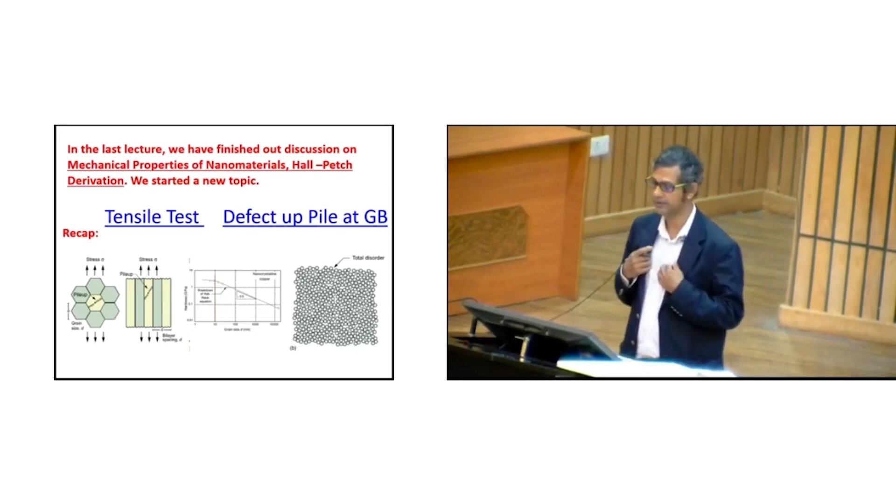So, the last lecture, what did we finish? We finished the lecture on mechanical properties of nanomaterials, and most importantly, we talked about the Hall-Petch equation, its breakdown, and other related aspects. Following that, we started a new topic on thermal properties of nanomaterials.

So, in order to provide you some recap, let me state that Hall-Petch basically originates from grain boundary strengthening. Dislocations generated inside the grains pile up at the boundaries, and this is why grain boundaries act as an obstacle to the pile-up of dislocations. Hall-Petch provides a nice mathematical relationship between grain size and yield strength. This is true not only for single phase materials, but also for multi-layers and even multi-phase materials.

But at the nanoscale, the Hall-Petch equation breaks down. For nanomaterials, Hall-Petch has been found to break down in basically every metallic and ceramic crystalline material. It seems to break down at a grain size below a certain critical value, and that value can range from 20 to 5 or 2 nanometers. This is something widely observed.

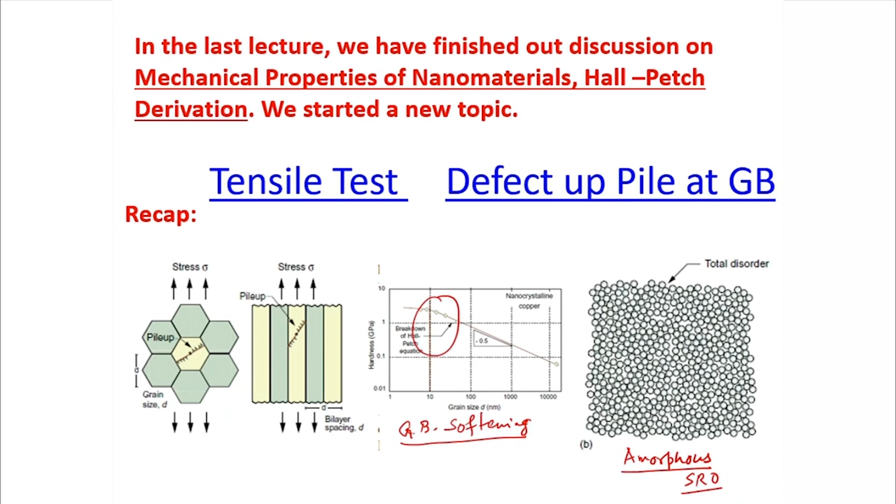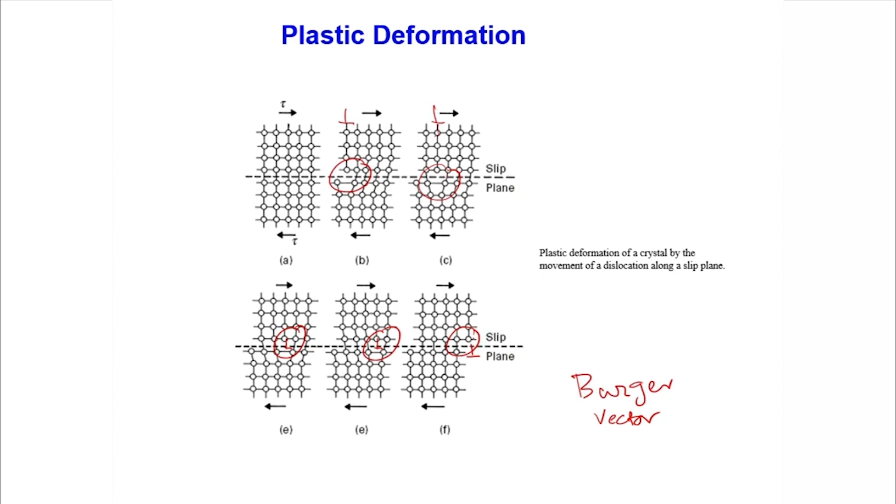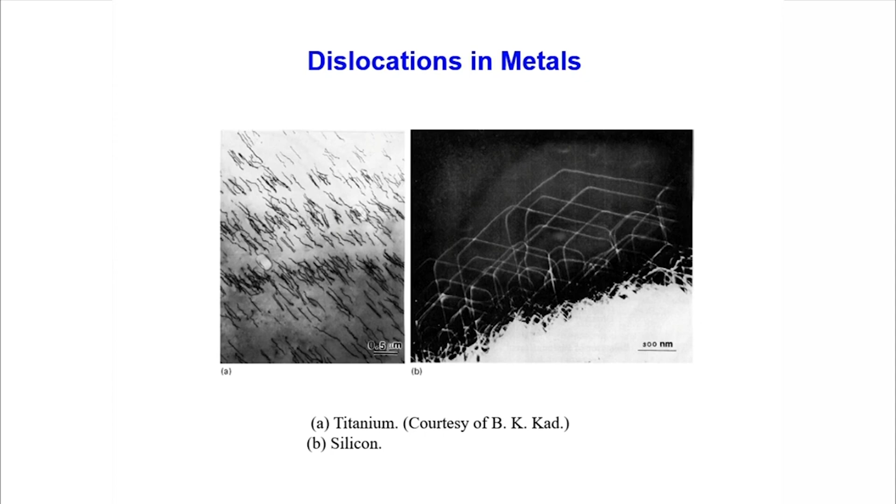As we said, therefore, in nanocrystalline materials or normal materials, plastic deformation which happens because of dislocation motion is the predominantly observed mode of deformation, as compared to amorphous materials. And dislocations are seen under TEM - I am showing this picture again with titanium silicon, where this has been observed. Similarly, it has been observed in ceramics also.

Now, the basic reason for grain boundary strengthening is not only that the grain boundary acts as an obstacle, but also that the grain boundary can act as a source of dislocation. Dislocations can be generated at the grain boundaries, or maybe at the Frank-Read source, then they can move inside the grains, and that is how they create a pile-up. You can see that the pile-up has already started - 1, 2, 3, 4, pile-up has started. So, one after another, just like a passenger standing in front of a railway ticket counter, the same thing happens.

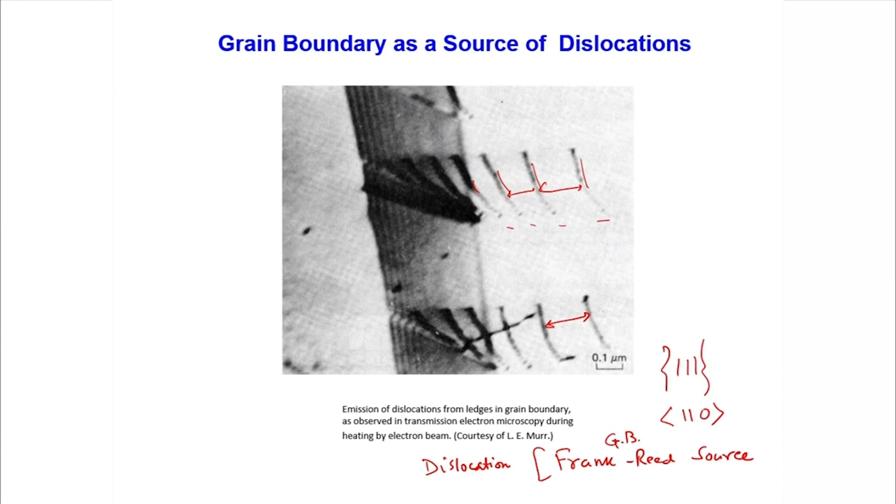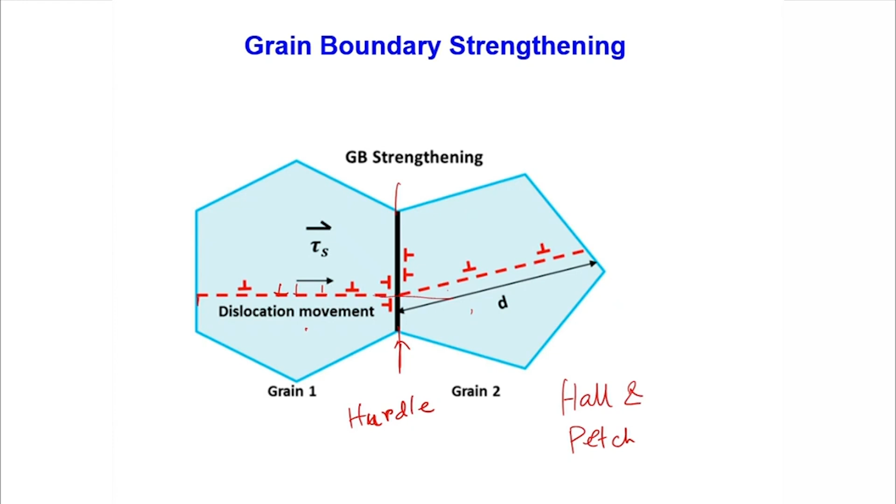This pile-up model, which we have been discussing for the last 2-3 lectures, is mainly the reason for the Hall-Petch equation. The central idea is dislocations are forced to pile up at the boundaries, either because there is a barrier to cross over, or because the source of dislocation must be activated in the next grain. This is something very important.

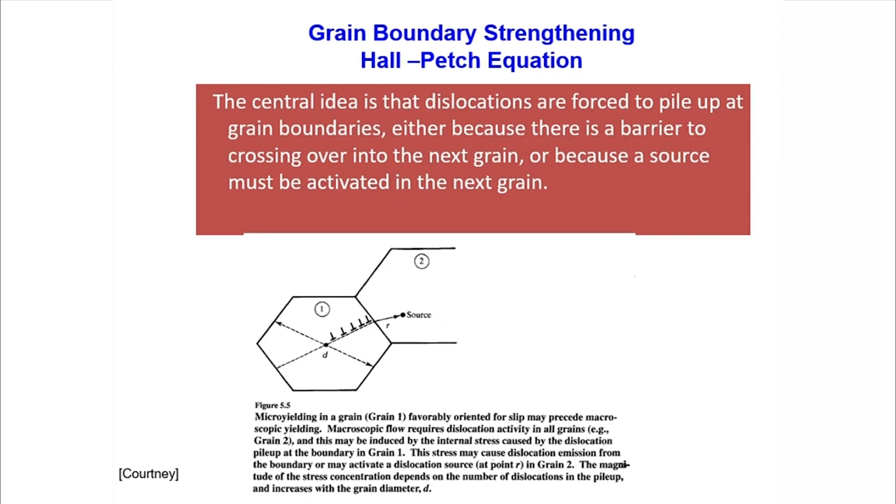The classical explanation is simple: the stress concentration in a given grain is required to initiate slip in the neighboring grain, and this leads to pile up, as shown in the last figure. The essence of the argument is that the stress is higher as the number of dislocations increases, so stress will be much higher as the pile up of dislocations increases.

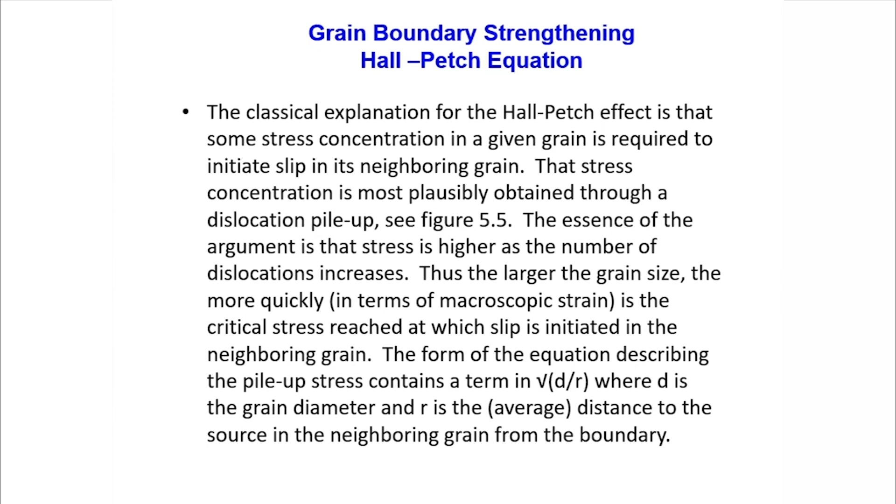As the size goes down, the number of dislocations inside the grain goes down, and at a particular grain size, only one dislocation can be accommodated inside the grain, and the Hall-Petch mechanism breaks down. That is what we discussed a lot, along with the mathematical derivations, which I will not go back into.

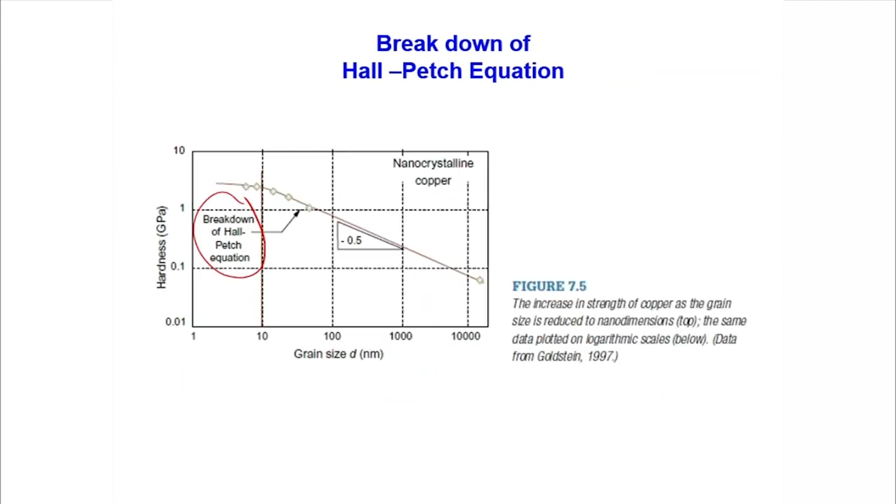These are some of the things which I showed you, how Hall-Petch breaks down in copper, nickel, or maybe in the case of multi-layers also.

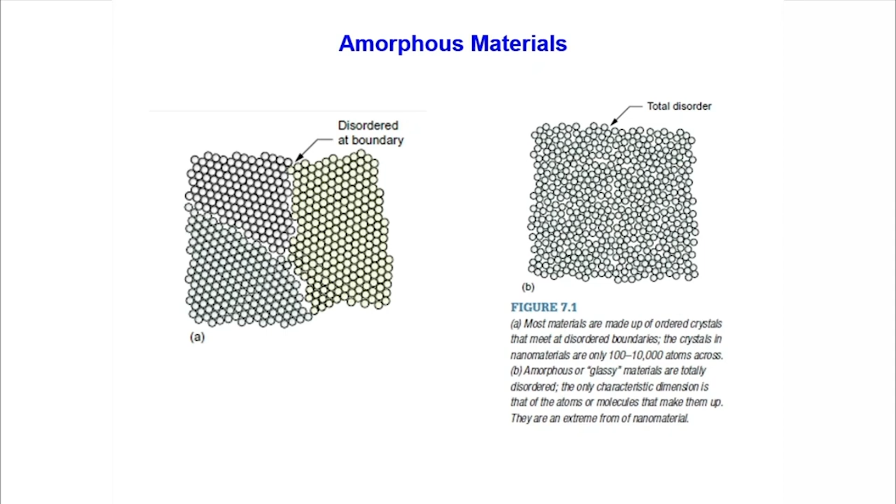Then we discussed something about amorphous materials. As you decrease the grain size smaller and smaller, grain boundary area increases and the material becomes completely random amorphous. This is also observed in polymers.

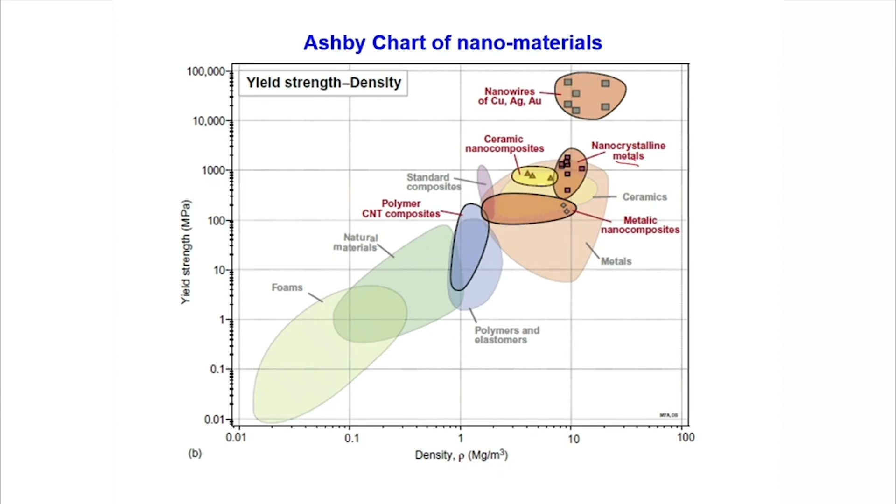So far, so good. We are going to start thermal properties. We already started some part of it in the last lecture. Thermal properties means what? It means if you apply heat, how the changes happen, that is what it is.

One of the most important characteristics of the material is the melting temperature. So, therefore, the first thing we will discuss is the melting temperature of nanomaterials. That is something very fundamental, and it is very important also.

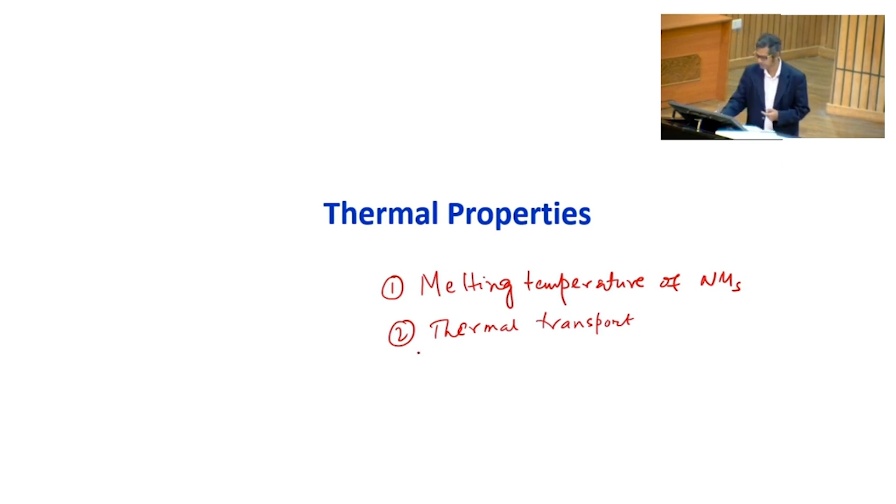Second thing we will discuss is thermal transport, which means how heat is transported. This happens because of phonons or electrons. We will discuss that also, but we will discuss the aspect of melting temperature in today's lecture. Please remember that, so we are focusing on these two particular things.

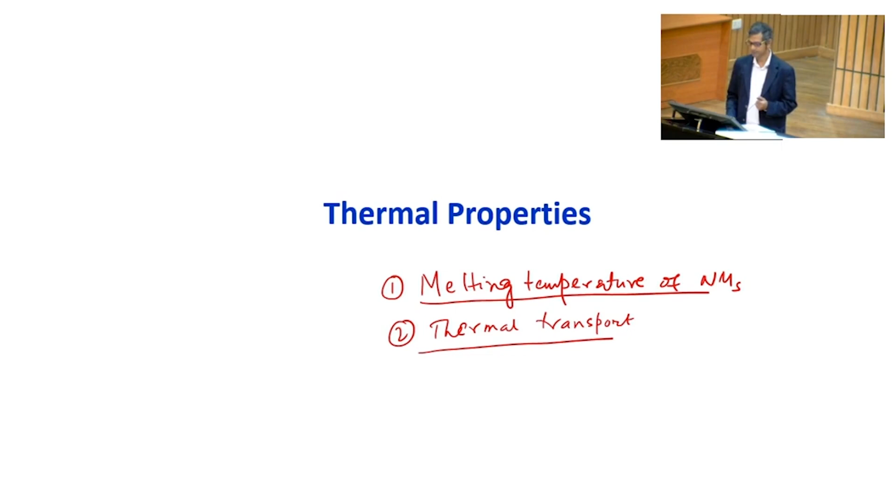There are many other things also possible, but we are not going to discuss all of them because of time constraints and because some fundamental concepts may be required for you to understand. That is why we started with: what is the thermodynamic description of melting of a bulk material?

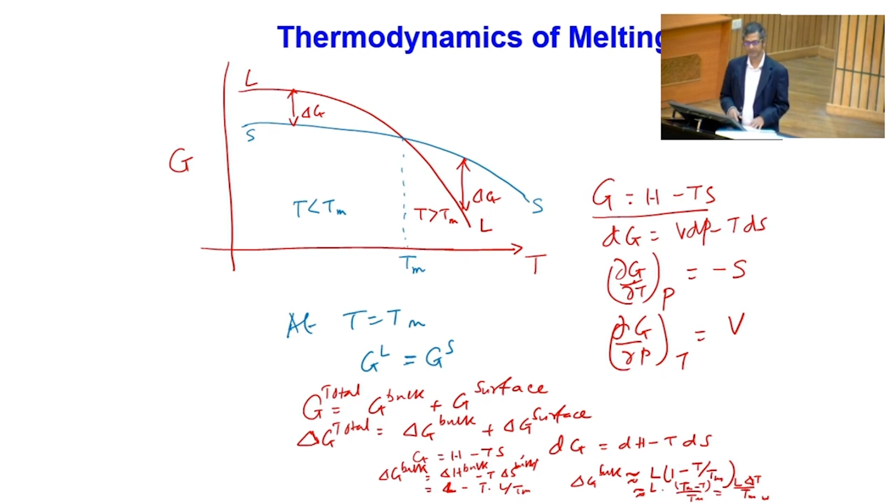As you know, the basic concept is free energy. At the melting temperature, the free energy of solid and liquid must be equal, that is the fundamental concept. Below the melting temperature, solid is more stable, above it liquid is more stable. So, the relative disposition of these two free energy curves dictates how free energy can be used to describe the melting phenomena in a bulk material.

We know free energy can be given as H minus TS. By doing a simple calculation, I showed you that the free energy difference delta G during melting can be approximated by latent heat divided by Tm, multiplied by Tm minus T, which can be written again as latent heat divided by Tm multiplied by delta T, where delta T is always considered as the supercooling, how much lower than the melting temperature you can do the melting. This is how one can derive delta G of melting, the amount of free energy change because of melting.

As you can clearly see, this difference, delta G, is basically proportional to delta T or Tm minus T. Why? Because latent heat and Tm are constant for a particular material. Remember, we are discussing bulk material here, not nano. This is something very important for you to understand. This derivation is there in any thermodynamics book. But what happens when you have nanomaterials?

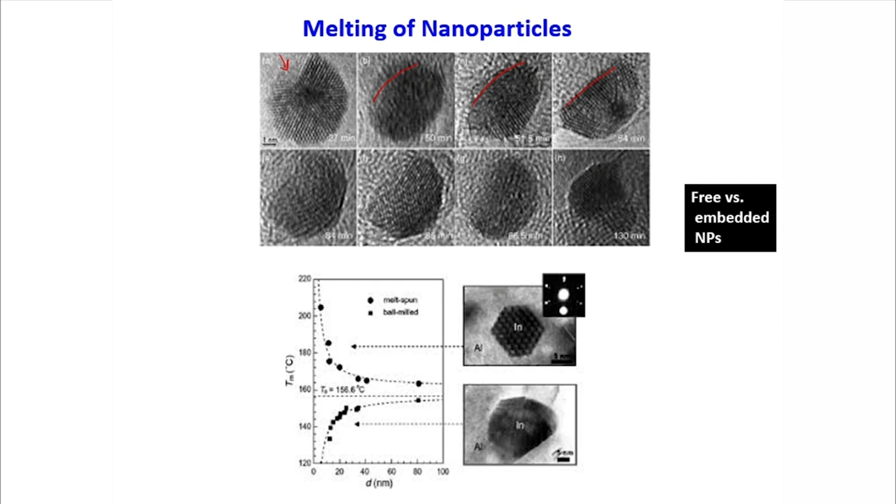Liquid cannot form inside the particle. It can form, there are some peculiar cases, but in general liquid can only form on the surface of the particle, because the surface acts as a nucleating agent for the liquid, right. So this is something which is very widely observed in many particles. Even you can look at this particle, which is indium, and once you start heating up, it will melt nicely. I will show you some pictures later, but it is very clear that the melting happens in a surface kind of way. Surface starts melting first.

So the model which people normally use is like this. This is from Ashby's book, Michael Ashby, and let us assume a solid particle of radius r, correct, radius of r, and so this particle started melting down. So when it started melting down, it forms a thin layer of liquid at the surface.

You might be thinking in the picture liquid was forming from one side, but remember in TEM you see only the projection of the image, you do not see the whole solid particle. So whether liquid has formed all through the surface or not cannot be completely confirmed, but we can always assume the liquid is likely to form evenly on the surface of the particle. So suppose this liquid forms, and because this liquid has formed, this is R, and this thing becomes R minus T. Am I right? So now we can very easily understand, and for this kind of particle, if liquid forms, you cannot apply, use basically spherical assumptions.

You have to know the particular shape and calculate it. My idea is to show that actual life is more complicated than whatever we do to understand things, but nonetheless, to keep it simple and nice, let us assume the particle is spherical. Let us not assume the particle has facets, because then you have to calculate the area of the facets, and other complications come into picture, like which facets will melt first.

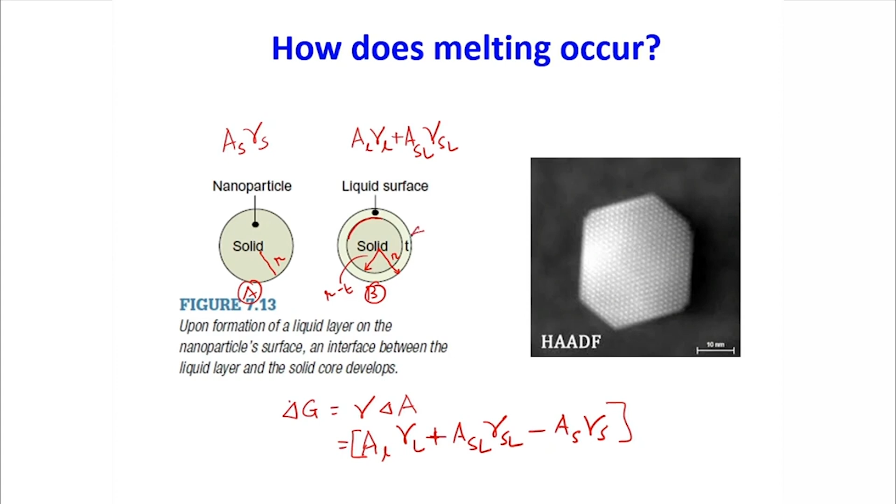This is something which is very typical even in nucleation of solid also. Those of you who studied metallurgy know that for heterogeneous nucleation of solid from liquid, we use such a kind of expression also. So AL into gamma L is this surface energy, meaning surface energy of the liquid; ASL into gamma SL is this surface energy; and this one is this surface energy. New configuration minus the old configuration, that is what gives you the change of delta G.

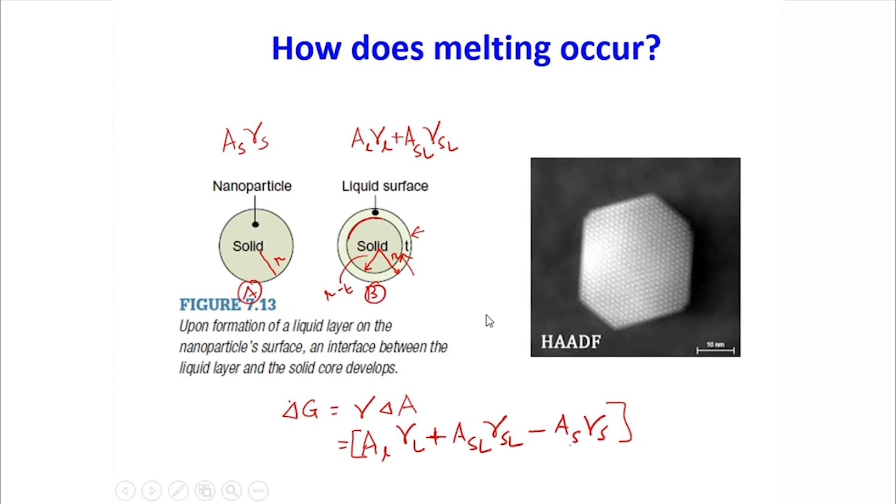So now I can go back. Therefore, G total is L times (Tm minus T), Tm minus T, not T naught, must not make a mistake here, divided by T naught at Tm, multiplied by VL, plus AL gamma L, plus ASL gamma SL, plus minus, not plus, minus AS gamma S. That is what we did. This is the total free energy of the system.

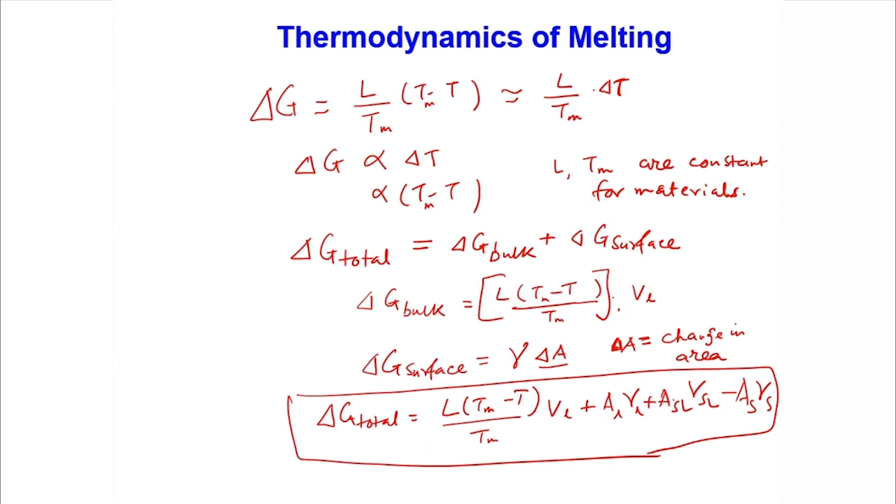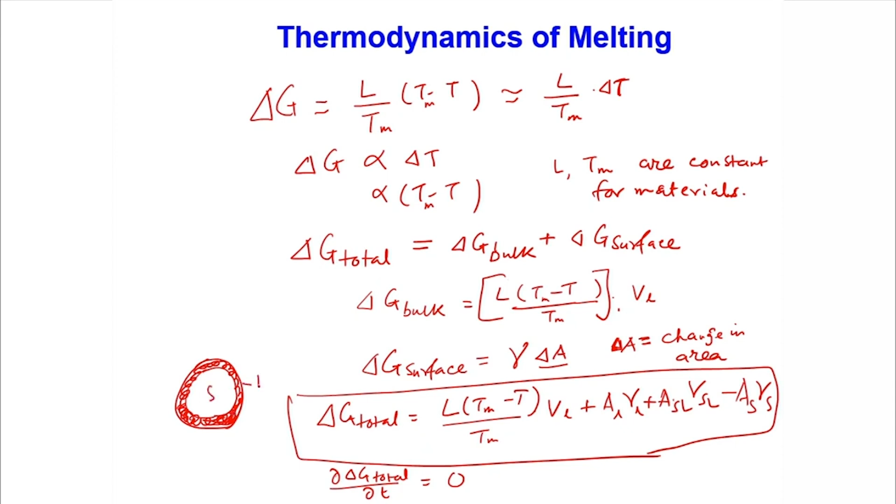Now, if you want to know the equilibrium between these because of melting, then you should make sure the derivative of G total as a function of thickness must be zero, because you are creating a liquid layer on a solid. This liquid layer on a solid has a thickness that is a variable. So at any temperature, how much will be this thickness depends upon the equilibrium between the solid and the liquid. That is why, if you apply this minimization principle of delta G with respect to thickness T, then you can get a relationship between melting temperature and something.

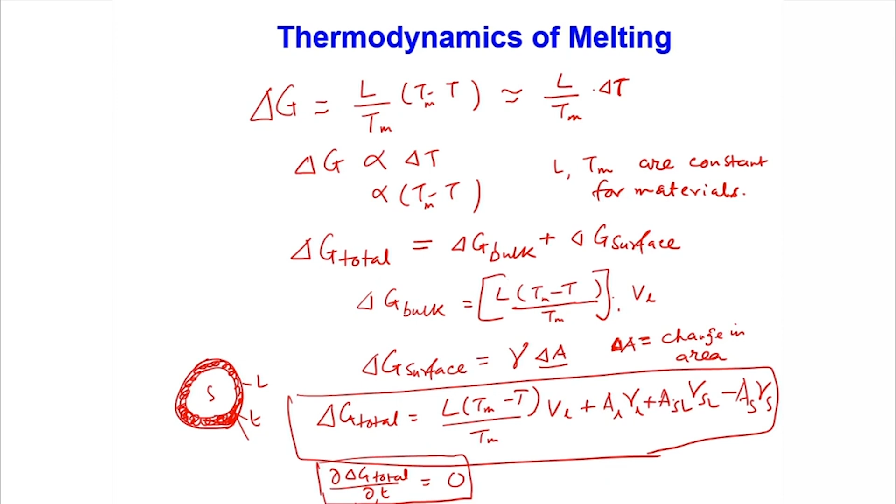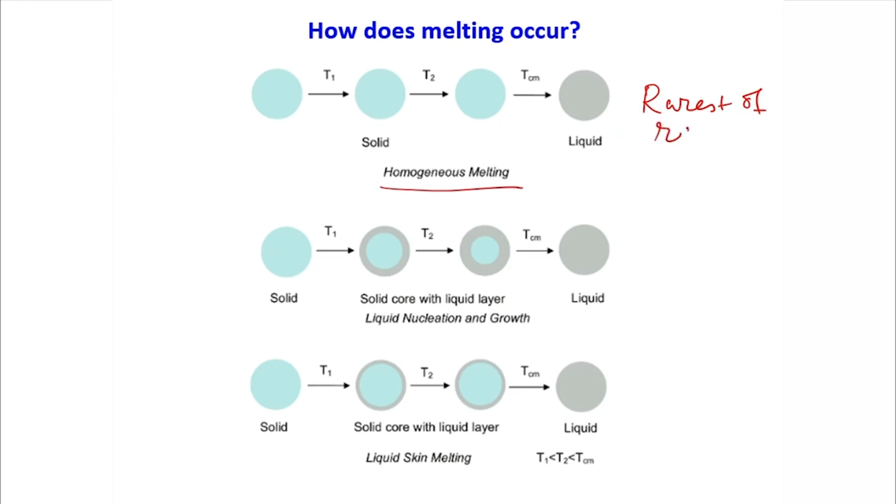That is what you have understood. Now I go back. This is again to show you how the melting actually happens. You see, this is called homogeneous melting, which is very rare, rarest of rare, rarely has been observed, or you can say it is never observed. This is something heterogeneous, nucleation of liquid and growth. This is something which happens very regularly.

You can see solid core, the liquid layer, and the liquid layer grows and melts. Or you can also have liquid skin melting, that means you have a very thin layer formation, a thin layer slowly grows, and in whatever situation, this liquid layer grows inside every time and melts. This is the model which is widely used in the literature, and this is acceptable. That is what we did. Okay, again I am showing you this aspect.

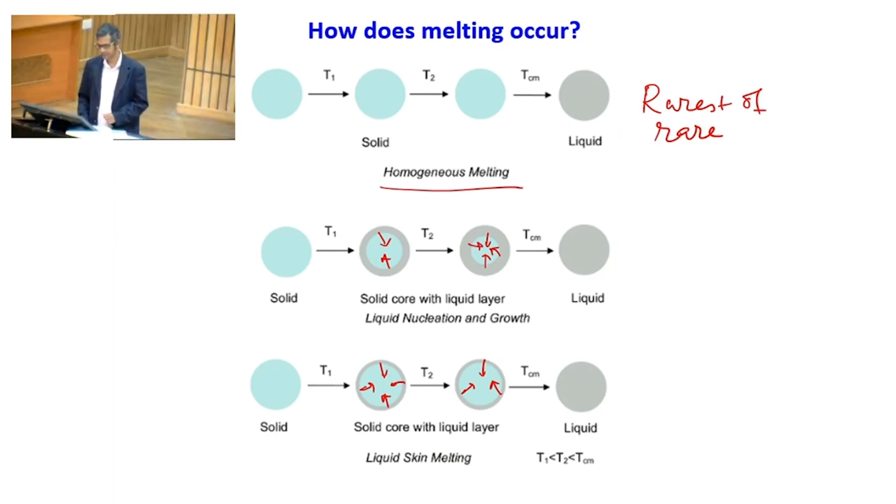So now I will write down again the whole thing. G total is L into (Tm minus T) divided by Tm, into VL, plus AL gamma L, plus ASL gamma SL, minus AS gamma S. Am I clear? So now, how do you calculate AL, ASL, and AS? How do you calculate that? Let us do that.

Okay, so this is the advantage of using this approach. AS is basically coming from 4 pi r square, the surface area of this particle, right?

What about AL here? Again, this is r, and this is r minus t. So AL is what? AL is again 4 pi r square, right? Because it is a liquid, and the liquid has a radius of r.

So what about ASL? ASL is this surface area, so that is nothing but 4 pi, r minus t, whole square. Am I clear? So AL and AS are same, ASL is different, correct?

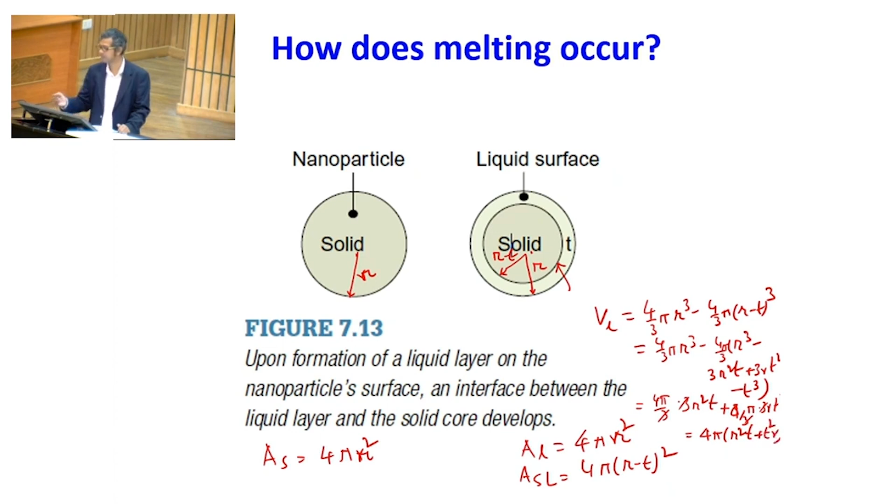We should not use this, this is a mistake we have done. So let us correct it.

We'll write it here, VL. The next step we are going to write it: L, Tm minus T by Tm, into 4 pi, r square t plus t square r, minus -- it is not plus, I think this is minus, yes. So 4 pi r square t minus t square r, plus r square, gamma L minus gamma S, plus r minus t square gamma SL. So now this is what delta G total by 4 pi is.

So now if you do a derivative of that with respect to the thickness t, what do you get? It becomes L, Tm minus T by Tm, 4 pi remains, so it becomes r square, and then it becomes twice r t, right, twice r t. This is 0 actually, because there is no t term here.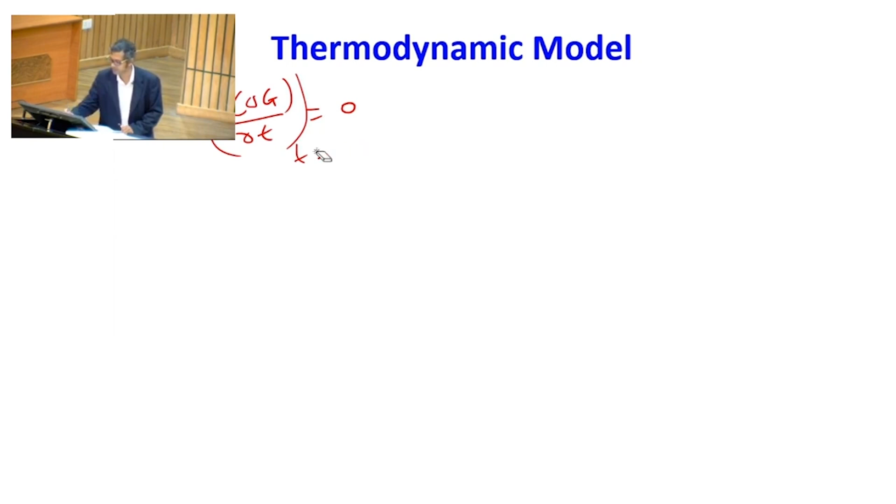So r minus 2t plus 2 minus 2 r minus t gamma SL - this is the actual expression. Once you do this analysis properly, assuming delta G by del T goes to 0 as t tends to 0, not infinity, you get this expression: L(Tm minus T)/Tm equals twice gamma SL by r minus t. If we assume t tends to 0, this becomes L(Tm minus T)/Tm equals twice gamma SL by r.

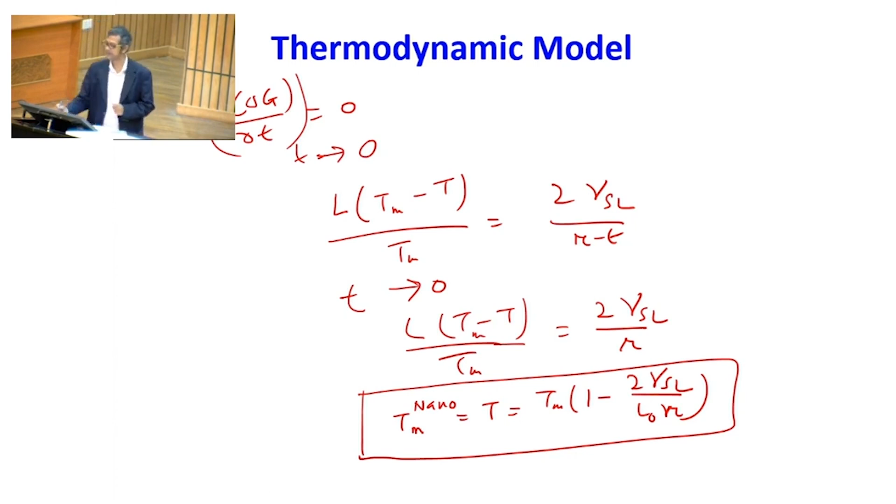It's getting reduced by a factor of twice gamma SL by L0 multiplied by R. As you decrease the particle size, the effect of R becomes stronger. This factor increases substantially because gamma SL for a particular system is constant, and L0 of a particular system is constant. So the factor that plays a role is the radius of the particle.

We discussed some of this already in earlier lectures, but this is the thermodynamic model. As you can clearly see, this twice gamma SL by R term is associated with the increase in internal pressure resulting from the increase in curvature of the particle as the particle size decreases.

So variables like gamma SL, L0, and R are all positive quantities. This means the melting temperature of a spherical particle decreases with decrease in particle size. I will show you some experimental results - this one is for pure gold.

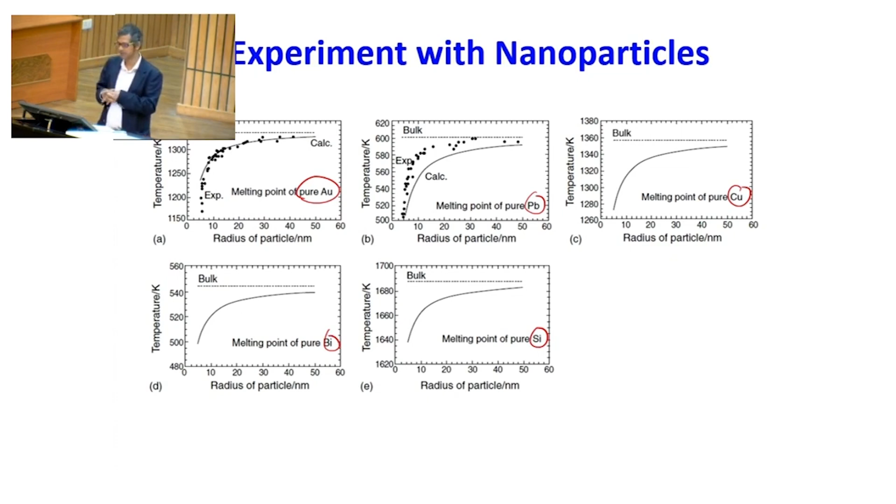I hope you have understood this model, and I would like you to do this calculation yourself and confirm it. Whenever we come back, we will discuss further. Next we are going to discuss something different - that discussion was mainly for nanoparticles which are free, not embedded, not coated.

I have shown you some pictures earlier, especially the left hand side picture, where you can see nanoparticles dispersed in a matrix. This is taken from Nicholson, Thomas, and Nutting - it's basically an aluminum matrix with precipitates embedded in it.

So what happens to these particles? Will they follow the same model? Obviously not, because here the particles are embedded in a matrix, so their behavior depends upon the matrix-particle interface. In the earlier model, we used a free particle with liquid forming on the surface. Here the particle is not free, it's embedded, so how the liquid forms between the particle and the matrix is what will dictate how the melting happens. Let's talk a little about that.

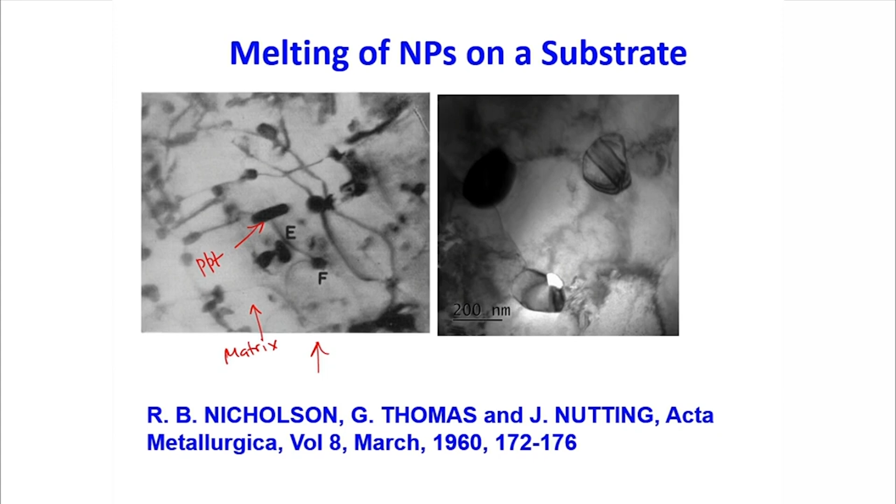Will this nanoparticle melt as usual below the bulk melting temperature or not? To answer this, we need to consider that the surface of the nanoparticle is in contact with the matrix instead of being exposed to the surrounding atmosphere, as in the earlier case. Therefore, the interfacial area and interfacial energy per unit area gamma SL must be energetically balanced by Young's theorem. What is that? If you have a particle sitting on a substrate, there will be a contact angle between the particle and the substrate, and this is where the surface energies are balanced.

This is the point here, you see. This is again taken from the book of Michael Ashby and others, and you can write down very easily: gamma Lm is equal to gamma Sm plus cos theta of gamma Sl. So we can write cos of theta, which is the contact angle, cosine of contact angle, is gamma Lm minus gamma Sm by gamma Sl.

This top equation is known as the Young-Dupré equation. This is again Thomas Young, same guy who discovered the double slit experiment of diffraction. So this is something which is very clear.

That means the gamma SL must be energetically balanced by the other two surface energies. Remember, the nanoparticle is embedded in a matrix, so the matrix-nanoparticle energies must come into picture, and we must not forget to include that. So gamma Lm is the liquid-matrix interfacial energy when molten, and gamma Sm is the solid-matrix interfacial energy per unit area, and theta is what is known as the wetting angle.

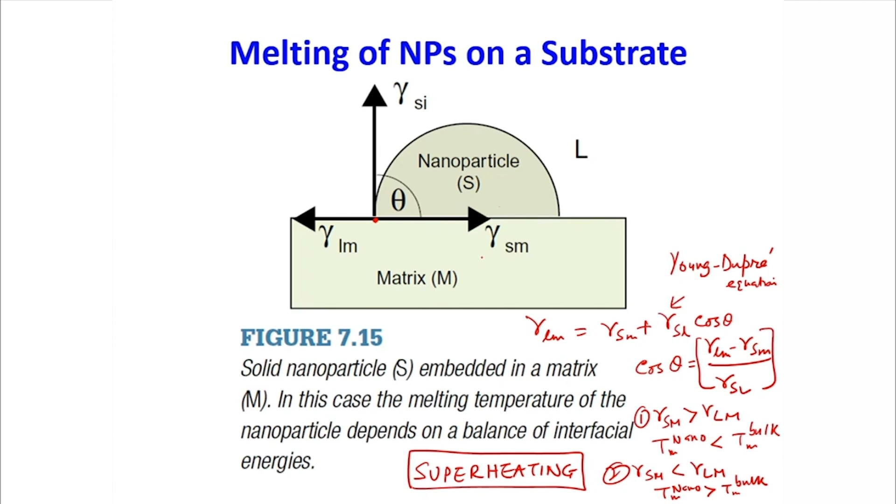The system says that by keeping in solid form, the energy of the system will remain lower. So the particle will try to remain solid at as high temperatures as possible, and that is why the particle gets superheated. This is nicely described in Ashby's book, except the derivation, which you should do as part of your assignments.

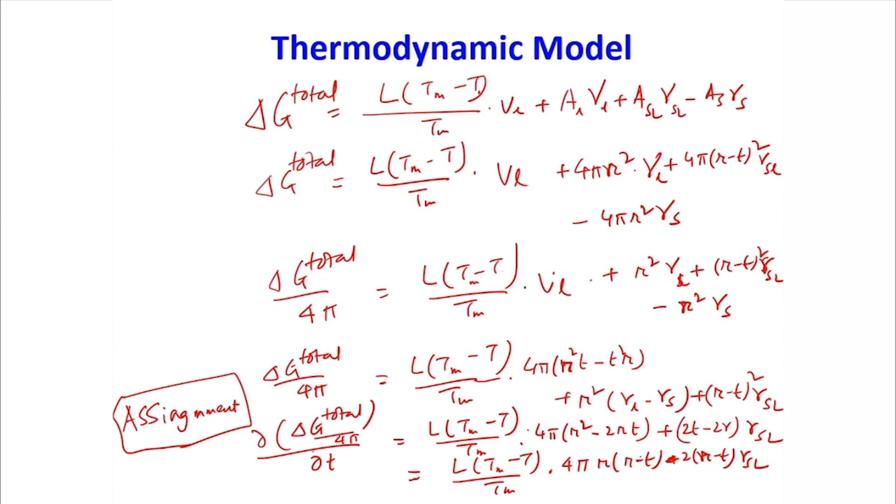We have discussed quite a bit in this class about melting temperature depression, and the two different situations: one is the pure case, the other is embedded nanoparticles, and I described different kinds of situations for embedded nanoparticles. In the next lecture, we are going to talk about thermal transport - how it happens and how it can be dealt with mathematically. Thank you.